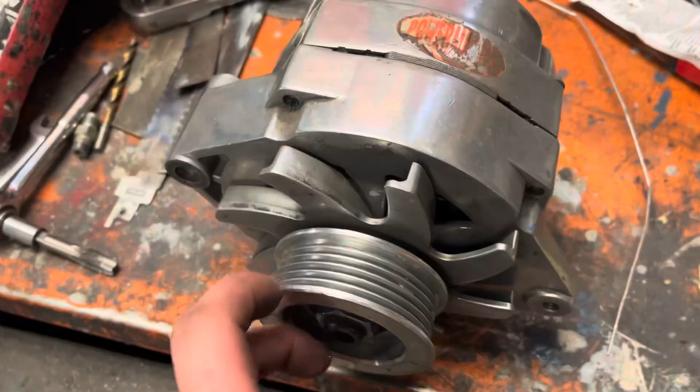I finally got out for some testing with the new turbo. Took me a lot longer to get out than I wanted. Had a few problems with the car trying to get it ready. The alternator stopped charging for some reason, I don't know if I mentioned that in the last video. I took that apart and got that fixed. The fuel pump started leaking, and I had an injector get stuck on it. Just a bunch of problems.

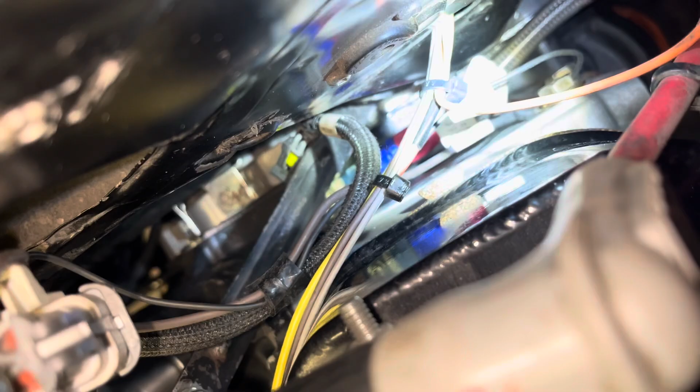So I'm going to take a look at the leak here first. It is leaking from the pressure sensor. I tried to snug it up, but I don't know if I over-tightened that or what, but it's definitely broken now.

You're turning. There we go, we got it. Crisis averted.

Got her. But good news, we finally got out. I went to Ontario Street Outlaws, no prep race, on the straightaway on the road course, which I've been to once before. Didn't really make any successful passes there, so I don't have a lot of data there. And unfortunately, with the shocks being changed and the turbo being changed, I'm just really out in left field.

So I made a couple of little test hits on the road just to try and get things in the ballpark. I think I had the shocks close, and I adjusted the tune a little bit.

So first round I had a pretty good draw. It was another first-gen Camaro, but it was his first time at no prep. So you never know, it is no prep, surface is the equalizer. So I just stuck to the plan and went with the tune I planned to run.

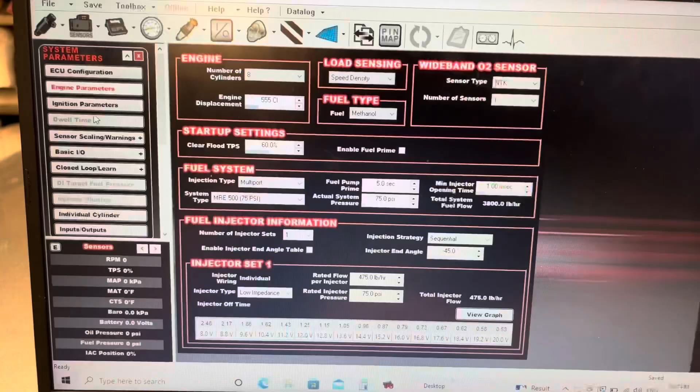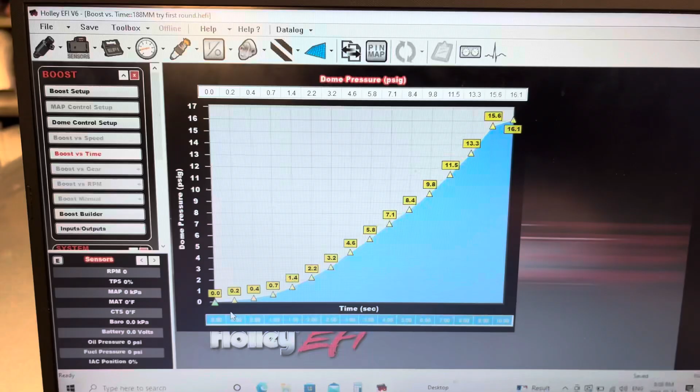So I had shocks all figured out. It'll probably leave somewhere around 3 pounds of boost, 2.5 pounds of boost, something like that. As far as my boost curve goes, it's my pretty standard boost curve for around a 6.0 tune. So it's on wastegates for pretty much the first second, and it'll probably get up to about 7 or 8 pounds of boost.

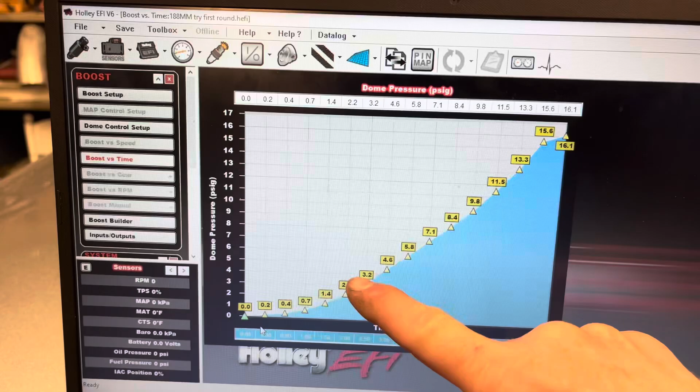And this is dome pressure, so it's on wastegates to about 7 or 8 pounds of boost, then it adds dome pressure from there, up to around 16 pounds of dome.

And timing-wise, I did switch my timing retard back into the basic IO timing retard table, because the car has really been struggling to do a burnout pretty much all year, and it's worse if I have a really slow tune in the car.

After finally having enough of it, I started looking into it. Basically, when I was doing the burnout, the way I had my advance table set up was, once it went full throttle, it was pulling timing as if it was launching the car. So clearly it wasn't working.

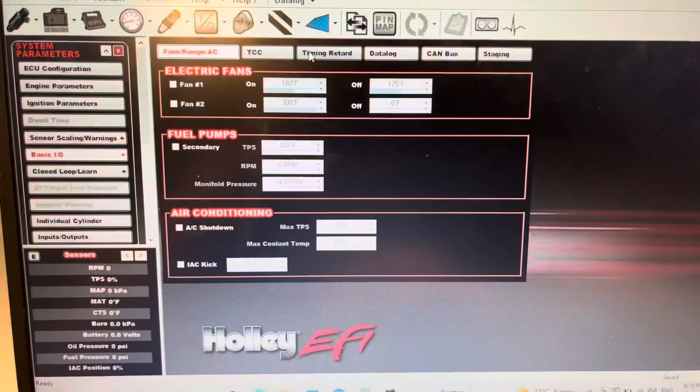It would do a burnout if I was right in the water, but if I didn't get the wheel spinning enough in the water and started rolling out with it, it was done. It would barely do one. So I've switched it back to this table and have it activated on trans brake release.

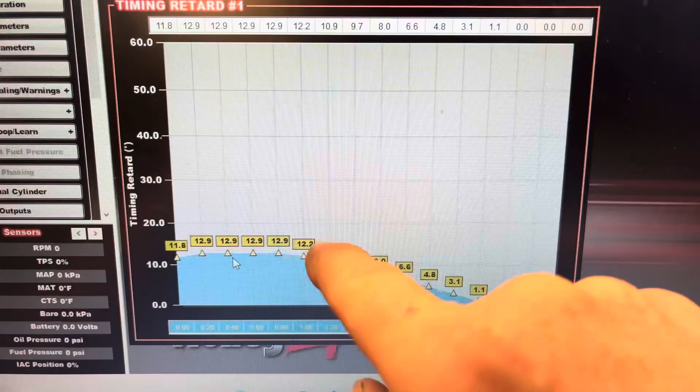And I'm pulling a ton of timing here, but this is what it really took to get it moving on my street. Basically it's pulling almost 13 degrees of timing for about 1 second and ramping it back in over 3.2 seconds. I'm not trying to set the world on fire here.

I'm hoping this tune is going to run somewhere in a 6 to maybe a 6.20, something like that, if it actually hooks.

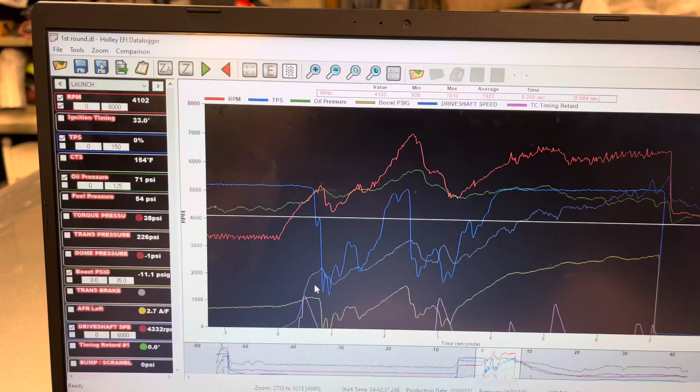So here's the data log. This blue one right here is TPS, so you can see that I basically pedaled the car for almost 4 seconds of the run. But it was still kind of moving. The other blue one down there is drive shaft, and it was mostly accelerating for most of the run.

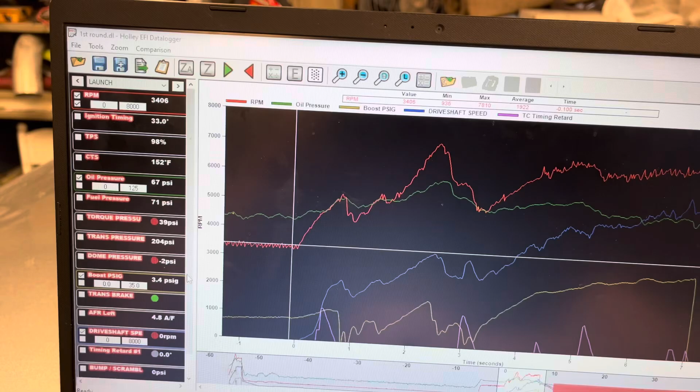Wasn't real great. This one's boost, so you can see pretty much right here on the brake, it actually made a little more than I thought, 3.4 pounds of boost. And up top it made 13 pounds of boost, 10 pounds of dome. Obviously I didn't get on the scramble button or anything.

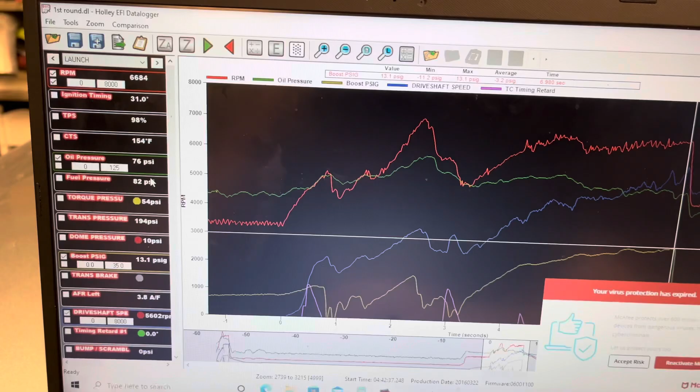My oil pressure is good, right at 76 PSI, which I really wanted to keep an eye on this pass. That looked good, oil pressure was something I was really watching. If the oil pressure was messed up here, I was just going to shut it down, take it home, and figure on taking the engine apart.

The oil is still a little more metallic-y than I would really like. I flushed it a few times, so it looked good. So I went for second round.

Ended up drawing Mike Batista. I raced him probably in one of the most recent videos when I was at Grand Bend, and I know his car's working really well, so I knew it was going to be a tough race.

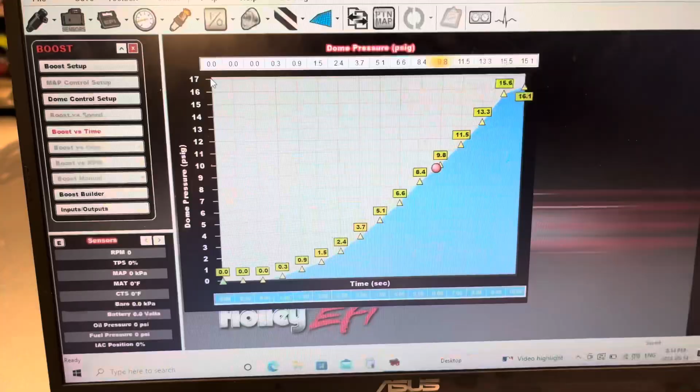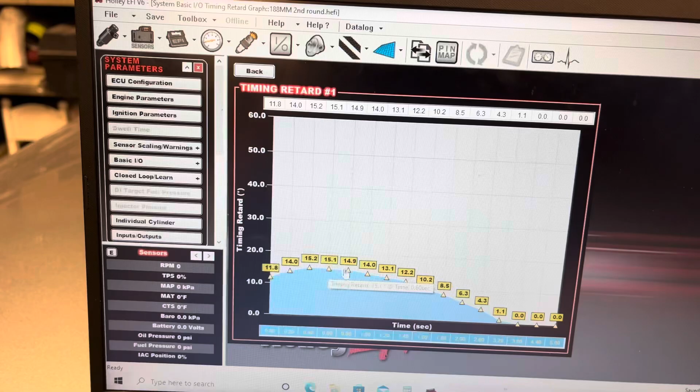So I tried to turn the tune down a little bit more. Second round tune, I think I left the boost pretty well the same. I really went to calm it down on the launch a little bit. I pulled 50 out of the launch RPM and tried to take a little bit more timing out of it. So I pulled another pretty much almost 3 degrees all through there and left it stretched out about the same.

So it didn't really work, I ended up red lighting on that. Since I was there just to test anyways, I thought I would maybe just try to get a little bit of an edge on them and try to guess the light. But didn't work out, I was too early. So that was it, out of the racing.

So I put a tune together for a test pass. It actually hooked up pretty well there. I'm not exactly sure why, but it did leave pretty decent. So I decided to make a little shock adjustment, and I put another degree of timing back in it to see if it would take it.

But clearly didn't like that. Just got a lot of wheel speed pretty much. And I think the tune was just too hot. To me, the suspension looked pretty decent. It set the rear tire. The front came up not bad.

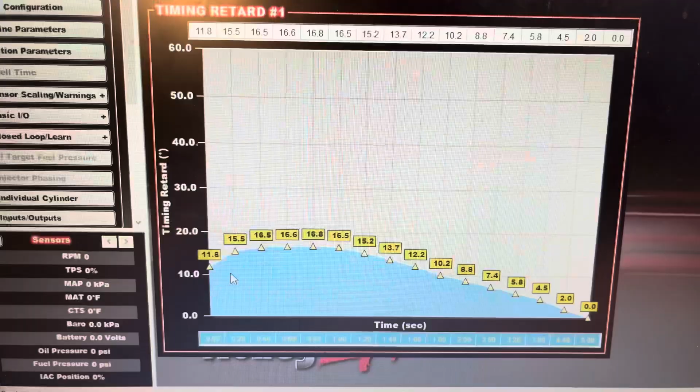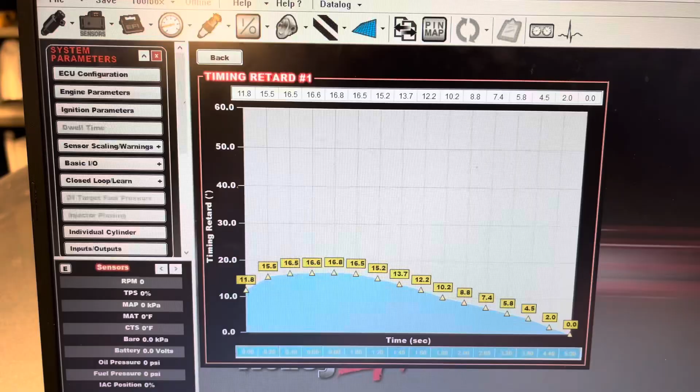And just to me, it looked like it just had too much power in it. So I went back to the drawing board and really just tried to kill this thing, try and turn it down even more. So I just tried to kill it, see if I could get the car to go A to B. I knocked a bunch more timing out of it, almost 17 degrees. I don't think I've really ever pulled that much timing out of it. And I stretched it out over basically almost 5 seconds. So not really what you want to be doing, but I want the car to go A to B under full throttle so I can start picking away and making it faster.

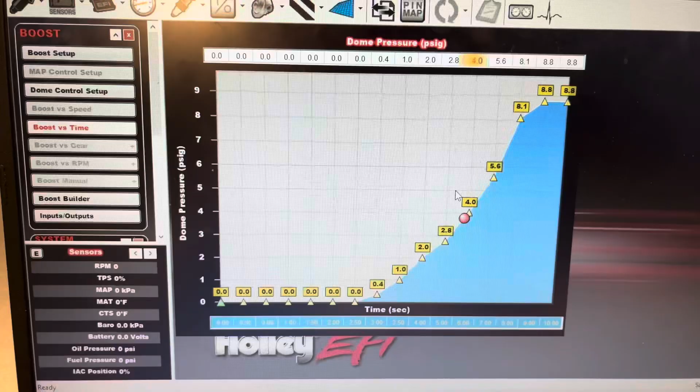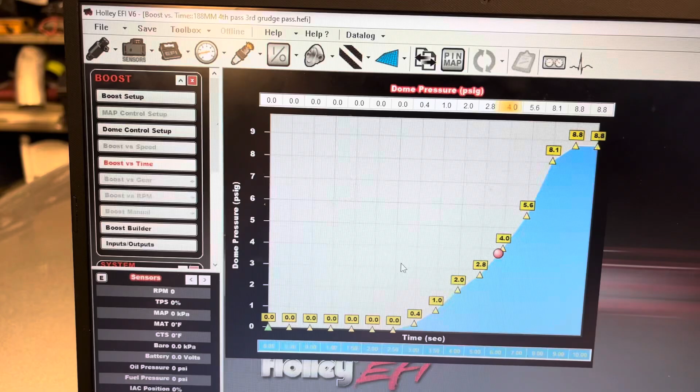To me, suspension and stuff didn't look too bad. As far as dome pressure went, I pushed it all out till 2.5 seconds basically, so it'd basically just be on wastegates. I really just wanted to see if I could get the car to work on the front half and see if I could get it to make it like 200 feet or something like that.

So I gave it a shot. Same thing, just picked up wheel speed right away pretty much. It's got a lot of wheel speed, and really when I pull second gear for the shift, the wheel speed just skyrockets basically. So that was pretty much the end of it. I did try to make one more pass, but just ran out of time.

So one thing I want to do is set up a gear retard on it so that when I shift, it'll pull a few degrees of timing for a few tenths of a second just to try to get it through that shift nice and smooth. So I'm going to work on doing that.

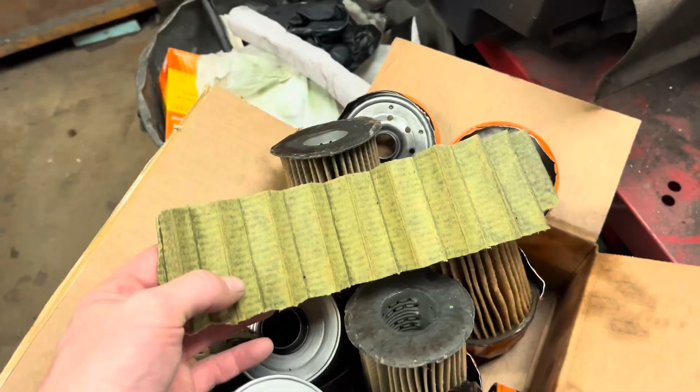So I did go ahead, I cut the filter open. This is the most recent one. These are all my other filters from this whole turbo ordeal. And the filter does look pretty decent. There's a few specks kind of floating around here and there, but for the most part, it looks pretty good. The oil to me is still a little more metallic-y than I would like, so I'm going to keep my eye on it still.

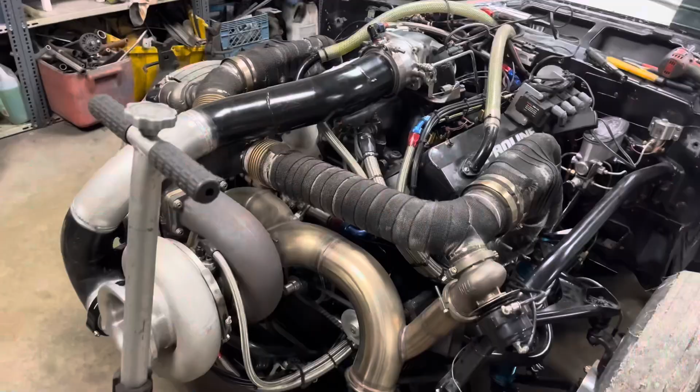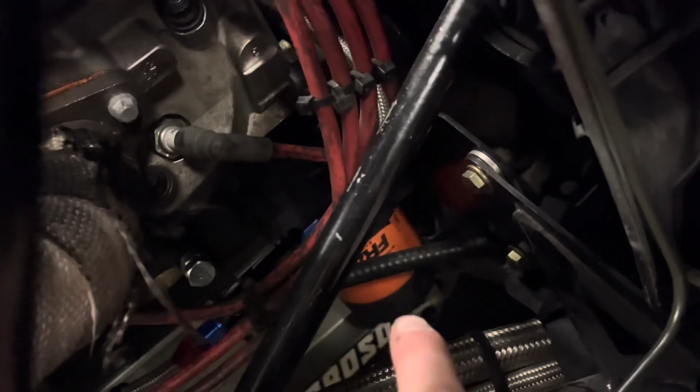Things are looking good. I got the front clip off it right now, checking things out. Turbo's looking good still, no issues anywhere else. So I did have my inline filter apart, you can see it there, and check that out. Don't worry, I only have this Fram filter on right now while I was cutting apart that Wix. But the inline filter, which is on the turbo supply line, is nice and clean. It looks perfect. So put that all back together.

And I did a couple other things. I pulled the distributor out, checked that all out. Everything, gear looks fine, don't see any issues there. Just trying to find if there is another source of this material or whatever. But so far, everything's looking fine. Yeah, I'm going to take it out again, I think, and just keep a close eye on everything.

So that's pretty much all I got for you guys. Not really a ton of real good progress. Made a little bit of progress on the burnout, made a little bit of progress on the shocks, they're closer and seem to be getting into the ballpark. And made a bit of progress with the tune and the new turbo. So things are coming together a little slower than I wanted. Really need to just get out there, test some more. Same old story, but everything's working. Things still running, so that's good.

So I think that's all I got for you guys. I'm hoping to get out and do some more testing soon. Maybe this weekend I want to go to just a Friday night test and tune or something, just try and make a couple laps on it. Try and get my tune-ups a little closer and just make sure everything's good. So work on the shocks as well.